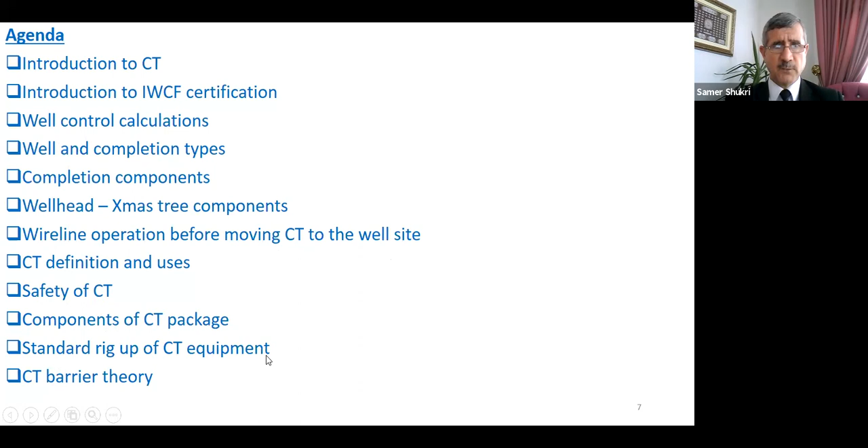We have coil tubing definition and uses, safety of coil tubing, components of coil tubing package, standard rig-up of coil tubing equipment, then coil tubing barrier theory, and also we'll go into pressure control equipment.

We have a primary barrier, secondary barrier, tertiary barrier. These are the 3 barriers: first line of defense, second line of defense, third line of defense, to work safely. Also, typical coil tubing surface stack up.

We have coil tubing applications. We go through them one by one, up to 10 applications.

Then we can discuss working in an H2S environment. We can have something about safety, risk assessment matrix. Quickly, we can look at it.

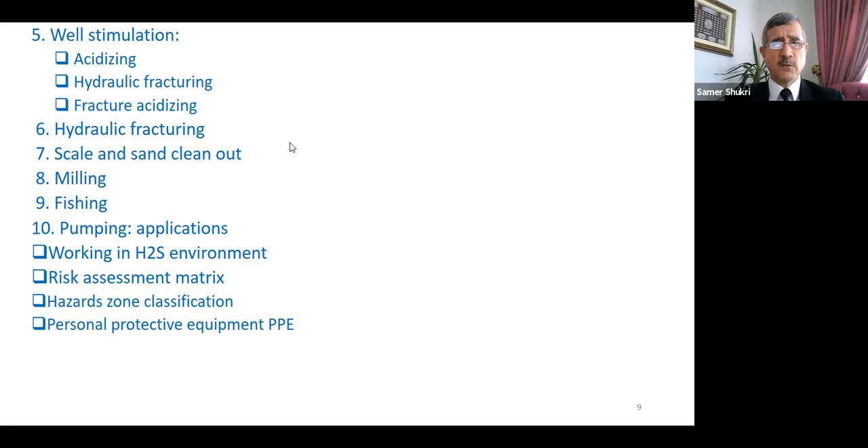Hazards, zone classification, personal protective equipment. These are very important information for you to enrich your knowledge, and without it, you cannot work in the oil field, because you want to protect yourself and others.

So we have life-saving rules. We can have a quick look at the Macondo well, Deepwater Horizon disaster. This is the worst case scenario that happened in the world for spilling of oil to the surface, as 4.9 million barrels of oil escaped from the reservoir to the surface uncontrollably.

We can discuss also the incident of the 3 persons who died in an H2S incident. Coil tubing emergency response procedures - these total 10.

So if you want to work as a coil tubing operator, assistant, or supervisor, you have to memorize these cases by heart. So we have to go through them one by one.

We have also experience exchange. You see here, I will share today only 7, and in the main course, there may be 17 cases. For the time being, we will utilize them, and after that we will go to more and more.

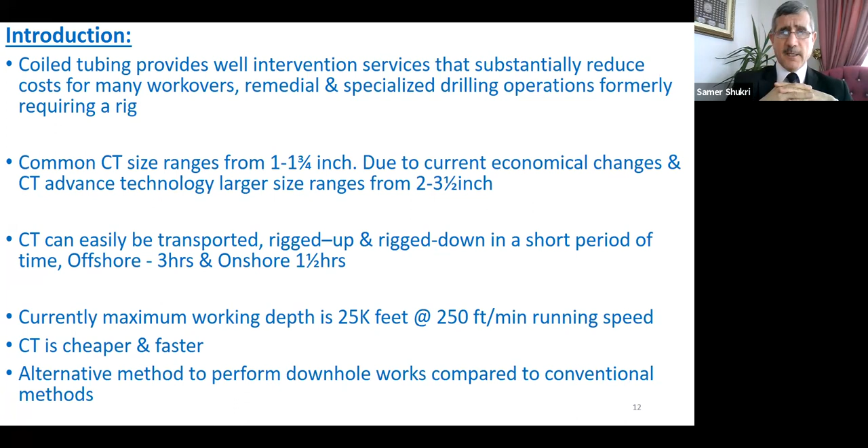So you can depend on it. Every place in the world, you can find this coil tubing. You can work many operations with it. We can have a look at this video, please.

Approach to enhance completion efficiency. Weatherford's vast array of through tubing technologies, coiled tubing conveyance, and industry-leading composite bridge plugs can reduce trips in the wellbore and allow more efficient plug milling.

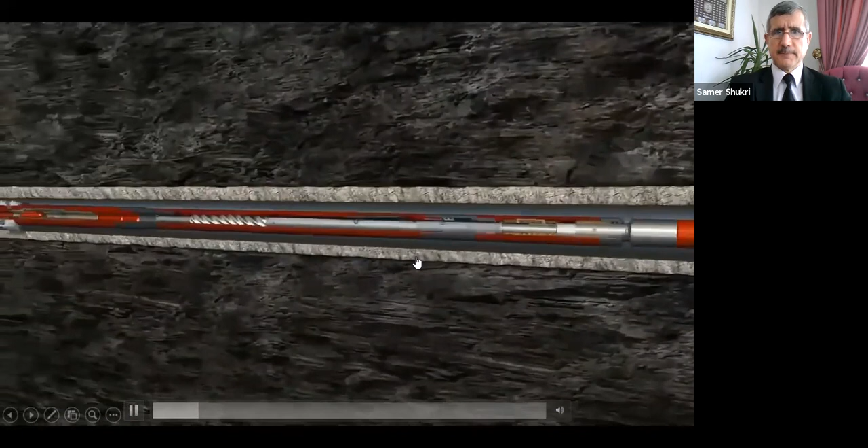You see, one with a milling assembly to prepare the toe and clean up any residual cement, and a second with tubing conveyed perforating guns to perforate the toe, since this is a horizontal well. Weatherford's Flowmax perforator allows this operation to be done in a single trip through the use of a flow-controlled valve, saving operators up to 30%.

Here, after drilling, we run it and do milling for this cement, and after that we will continue with the operation. This is the cost for this routine wellbore service.

After locating the cement obstruction at the well toe, circulation is increased to optimum milling rates to remove the cement and clean any debris. Once clear, the BHA can be pulled up hole to the initial perforating location.

So after milling the cement, this cement is resulting from the rig. After removing it, we can pull the milling tool with the coil tubing up, and then we do the perforation, flowing out the carbide jetting nozzles.

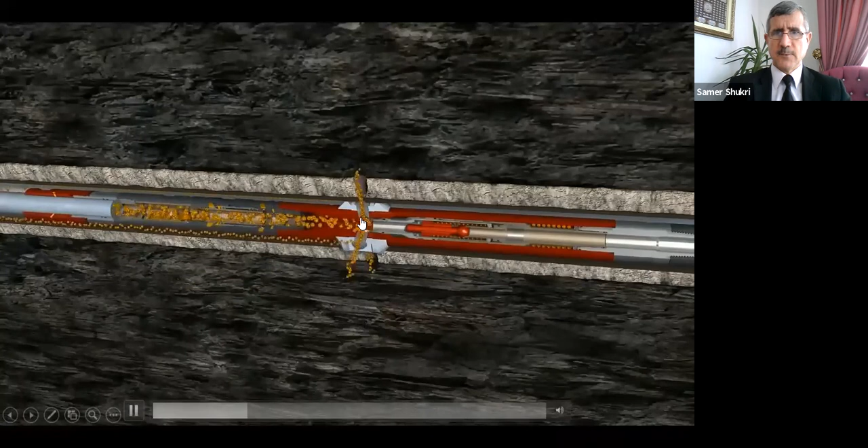Once at jetting pressure, a sand slurry is introduced to begin jetting through the casing, cement, and extending a cavity into the reservoir. You see, this is perforation. This process can be repeated multiple times until the required quantity of perforations are made.

After the coiled tubing BHA is removed from the wellbore, proppant-laden frac fluids are pumped from surface to fracture the formation, as pressure builds beyond the compressive stress of the formation. After perforation, we do the frac.

It seems that this video is long, so we'll restart it. No problem, we'll start again. One minute, please.

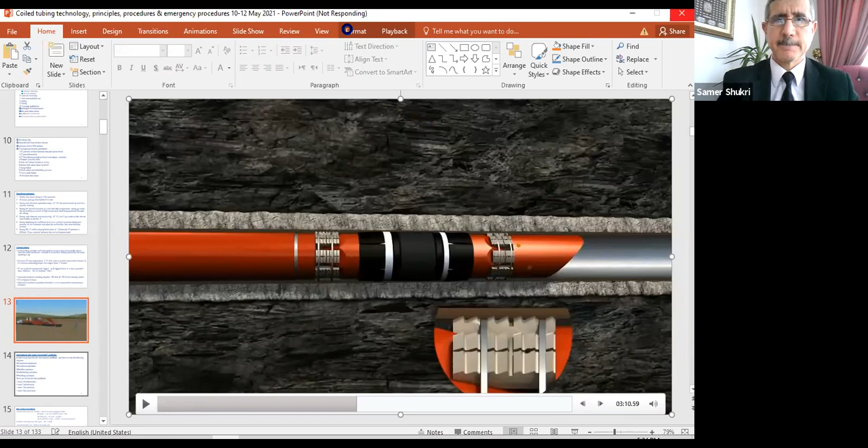About the IWCF certificate, we have 4 or 5 sections for IWCF: completion equipment, completion operation, wireline operation, coil tubing, and snubbing. Snubbing is rarely used, so we can focus on coil tubing in this course and wireline. Last time, we also focused on completion equipment and completion operation.

We have levels for this certification: 1, 2, 3, 4. So the new ones may be introductory for them. After that, the operator, then the supervisor.

Now we have these calculations for well control. I think you have them. You have to memorize them and keep them with you, because these are formulas very important for you to work in the oil field. So you can memorize them for calculating hydrostatic pressure, bottom hole pressure, reservoir pressure, specific gravity.

API, oil density, water density. All of these you have to memorize and keep in your mind, also for calculations and volumes.

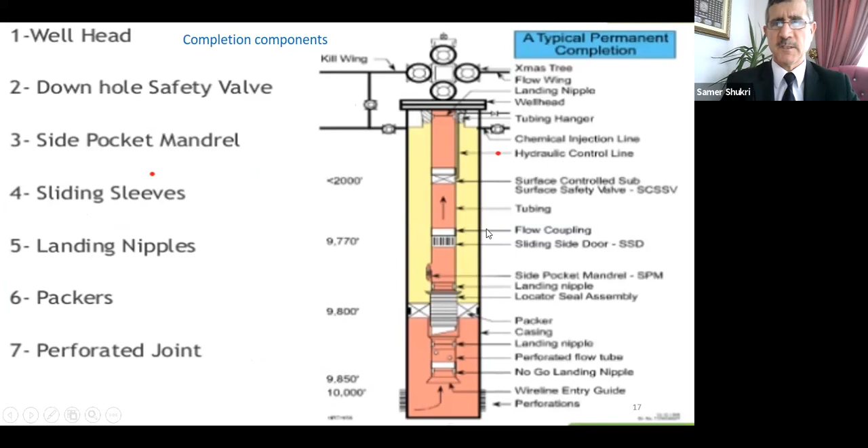Here also the completion components, we have them from top, from the Christmas tree to the formation. We have them one by one.

Here also the safety valve, subsurface safety valve, it is very important to secure the well in case of an emergency. So we have these types of the mechanism of safety valve.

This is a flapper type. Also we have ball and seat, but for this one, flapper type, we have flapper open. You see this flapper, it is open, the safety valve is open. When it is closed, the safety valve is closed. It is operated hydraulically from the surface.

Surface controlled subsurface safety valve. You will hear about it too much, so you have to learn these concepts and make yourself familiar with them.

Also, wellhead: we have wellhead that supports the casing head and tubing head, and at the top also we have the Christmas tree.

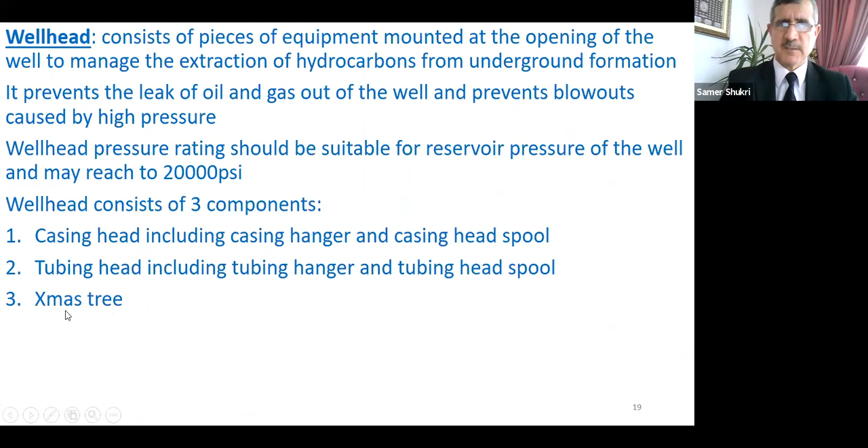These ones, this is the conventional Christmas tree. We have it normally 3 and 1/8 or 5 and 1/8, either 3,000 psi or 5,000 psi rated working pressure.

You see how big it is. The flanges, studs and bolts, they are worked on here in the workshop. So we produce from here.

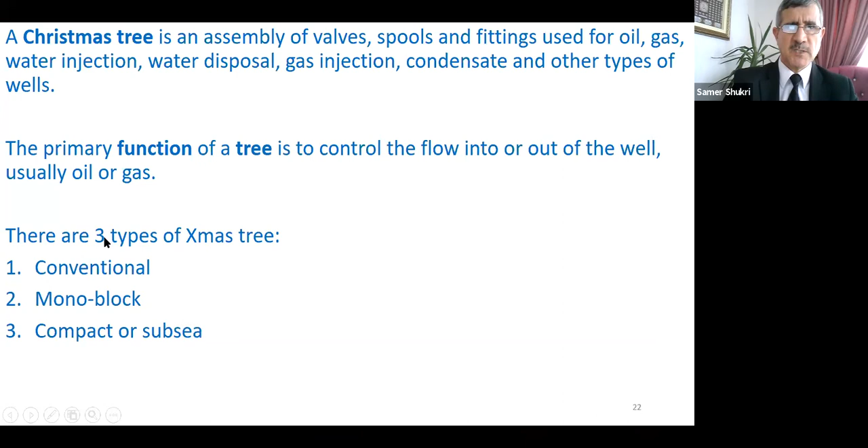This is the wing valve and to the station. Here is the Christmas tree. Also, we mentioned these types of Christmas tree.

This one, this is an actual real Christmas tree. Here is the wellhead, and above it the Christmas tree.

Here also you have to memorize all of these valves and know the name of this valve, what's the name of this. This is a choke valve, like this.

Here also the well will flow from here to the station. The station is here. We separate oil from gas and water. The gas is sent to the gas plant.

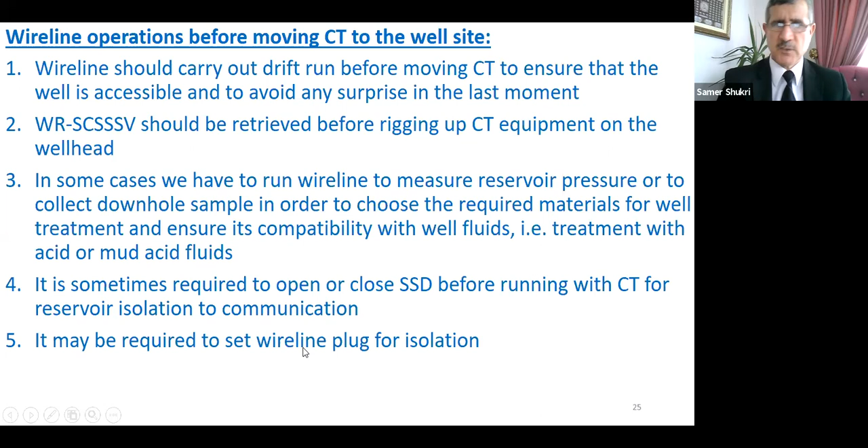Also, sometimes it's required to open and close the SSD, sliding side door, before running coil tubing, for reservoir isolation or communication. It may be required to set a wireline plug for isolation also. So wireline is combined with coil tubing, and it can be utilized for very fast operations.

Now we move on to the coil tubing. What is coil tubing? Coil tubing is a continuous string of tubing rolled onto a spool. It is made from rolling strip material into a tubular, so it is metal, continuous metal.

This metal is made up and welded in the factory by the manufacturer, welded, inspected, and tested. After all of these checks, we choose the required length, for example 20,000 feet, then send it to the end user, say Schlumberger or Baker Hughes or whoever, and they can use it with this length. Sometimes they send 25,000 or 15,000; it depends.

So the coil tubing industry is improving day by day, and it can save cost and save time, and it is efficient in the oil and gas industry. It has a wider acceptance in all operations involved in oil and gas exploration, especially in highly deviated wells and horizontal wells, because wireline in these two cases cannot work properly.

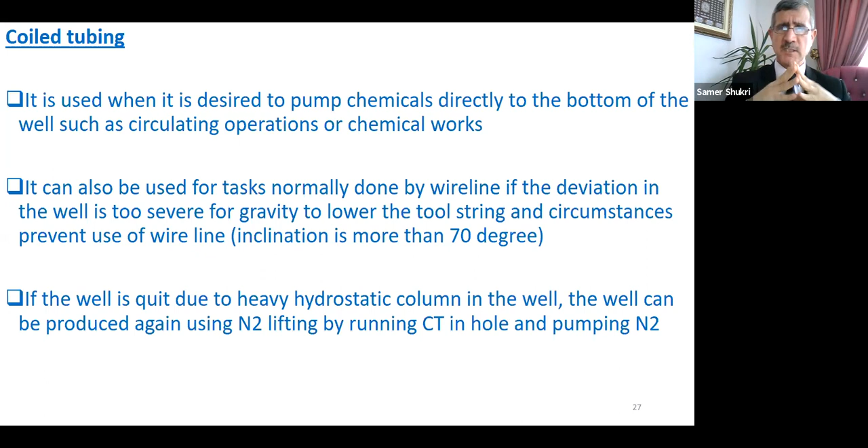If the well is quit also, due to its hydrostatic column being heavy, higher than formation pressure, we can pump nitrogen to offload the well's hydrostatic head that is exerting on the formation.

So here are 10 activities that can be performed using coil tubing. For example, logging, cementing, nitrogen kickoff, coil tubing conveyed perforation, closing and opening SSD in horizontal completion, stimulation and fracturing, scale and sand clean out, milling, fishing, drilling - all of these. So a very wide variety of operations can be done using coil tubing.

We have a heater, a heat exchanger, that moves the liquid nitrogen to gas nitrogen, after which it can be pumped. The boiling point of liquid nitrogen is minus 196 degrees Celsius, so it is very low. At this temperature, we can move the nitrogen from liquid condition to vapor or gas, and then pump it through the coiled tubing, through the inlet, down to the required depth.

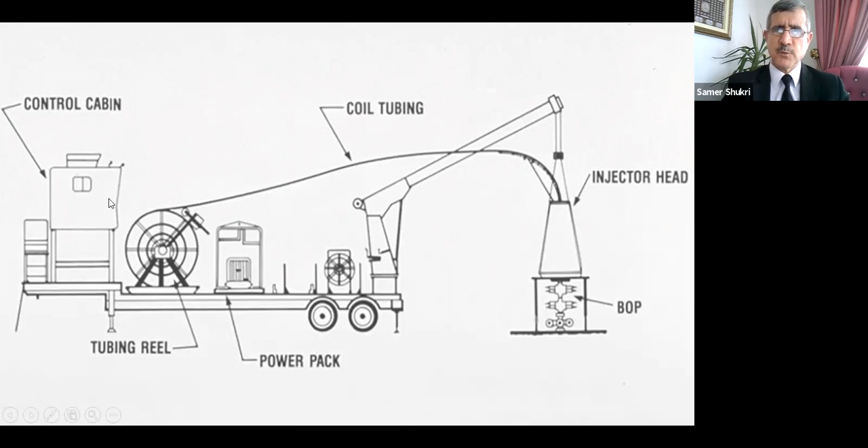Here we have the control cabin also. We can monitor everything happening on the wellhead and this area by the coil tubing operator, so it is under control. If there is a leak here, he can see it. If there is parted tubing here, he can see it. So clear vision is very important for the coil tubing operator to control - he is controlling the whole situation. Coil tubing application also, we can see this. I hope it will not make a problem with us.

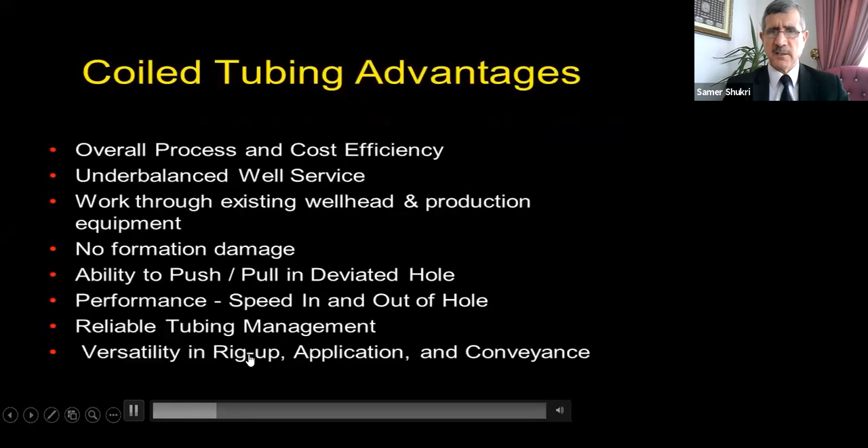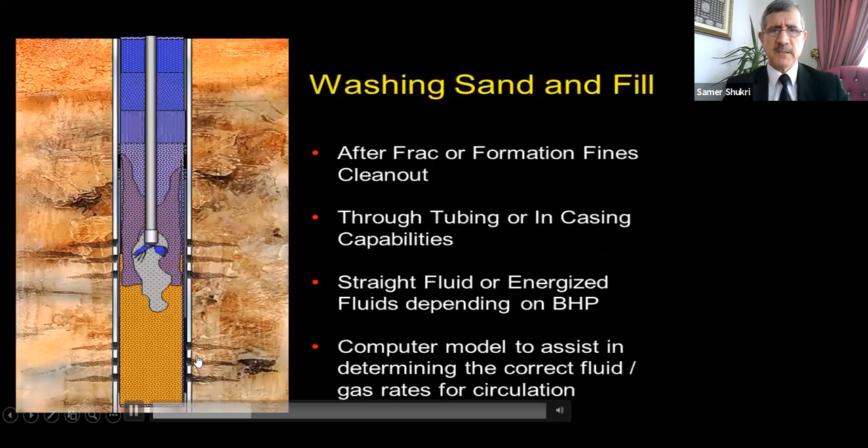You see, why coil tubing? We talked about this - in the course we will talk more about them. You see cementing, drilling, stimulation, well control, completion. So overall of these, the advantages - he is mentioning the advantages, rig breakdown, run, common applications, also removal of sand. We mentioned the nitrogen applications, acid, remedial completions, remedial cementing, washing sand and fill. We'll go through them one by one, but for the time being we cannot take long because it takes time.

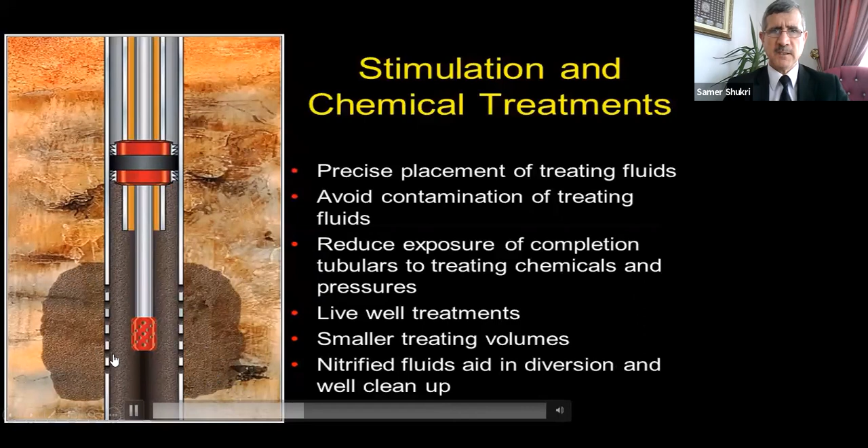We have to be limited to 1 hour for our session. So you see scale removal, nitrogen pumping. Also, we offload part of the hydrostatic head - here there is water, we can offload it to allow the oil to flow. Stimulation treatment also, we pump acid and improve the productivity of this formation. Here, siphon strings also.

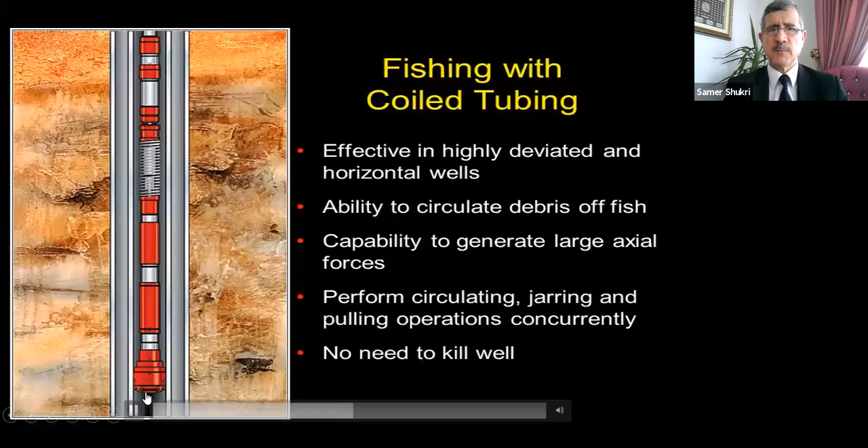Remedial cementing, we can dump cement using the coil tubing. If here we have fishing, we're using coil tubing. It needs much pull force, so we can use the coil tubing because we can go to 40,000 or 80,000 pounds. Here, set and retrieve bridge plugs - you see this isolation tool called the bridge plug, we can set it and pull it. Drilling composite bridge plug also.

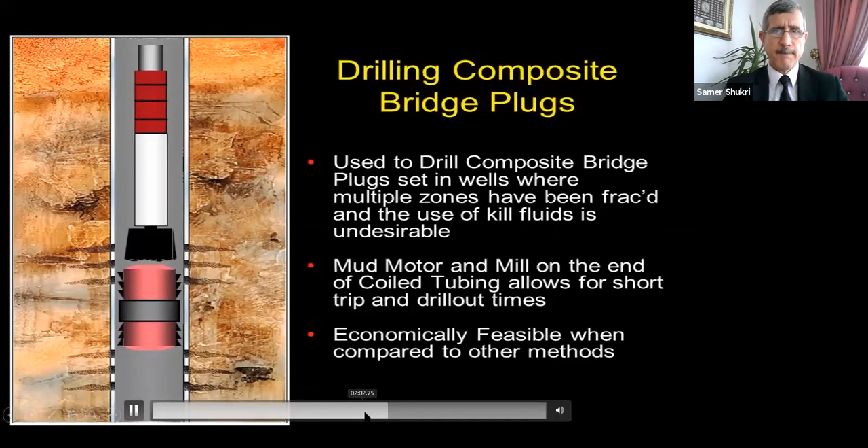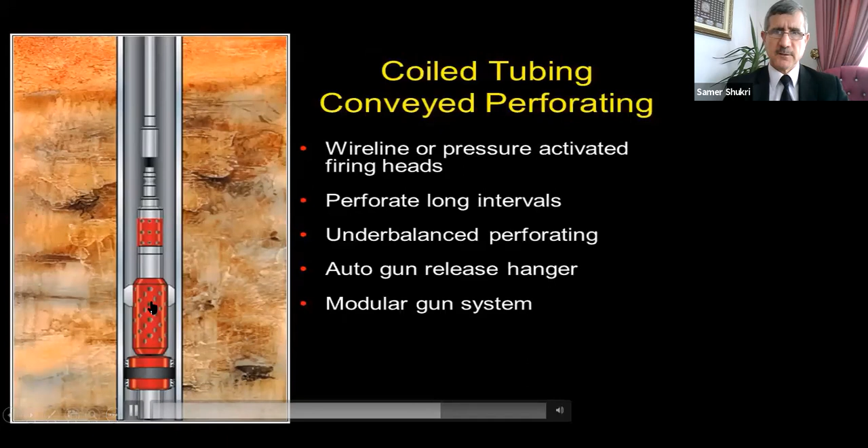Inflatable packer also - we can isolate the bottom part from the upper part of the formation and allow it to produce. Logging is a vital part of our work, logging on coil tubing, especially in horizontal wells - it is safe and can be done. Also perforating conveyed with coil tubing. We can also run completions with coil tubing and set it in the well. Recompletion, high pressure coil tubing applications.

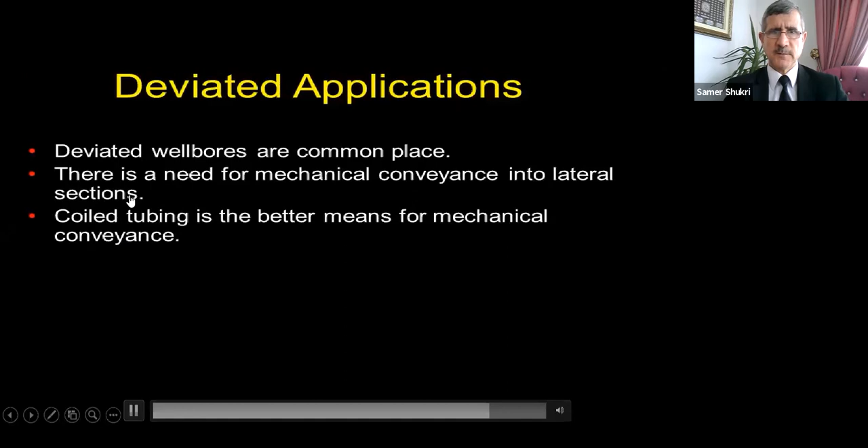Deviated applications also will work commonly, needing mechanical conveyance into the lateral. We have types of common cleaning tools: wash nozzle, fluid jetting nozzle, and positive displacement, 3 types, for blocking issues. We can go through them one by one.

Use of polymers, this is also chemicals that can be pumped into the reservoir to enhance its productivity.

Safety of coil tubing is a vital practice, ensuring that all components of the coil tubing package are certified and checked. Each single part of the coil tubing package should be checked and certified. If it is not valid, we have to reject it and request another valid and inspected equipment. This includes checks, function test, pressure test, and equipment certificates from manufacturers.

An incident of coil tubing could lead to damage. It can damage the equipment itself, cause damage to personnel working on it, and may lead to fatality, as well as pollution to the environment and damage to the company reputation. I will show you some videos now.

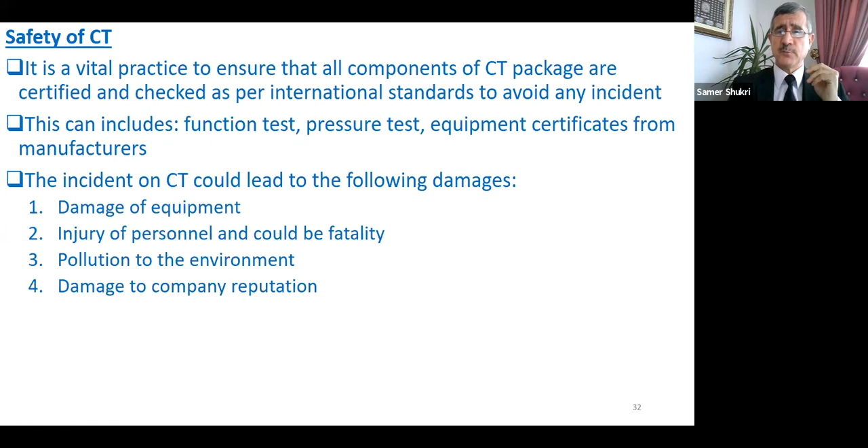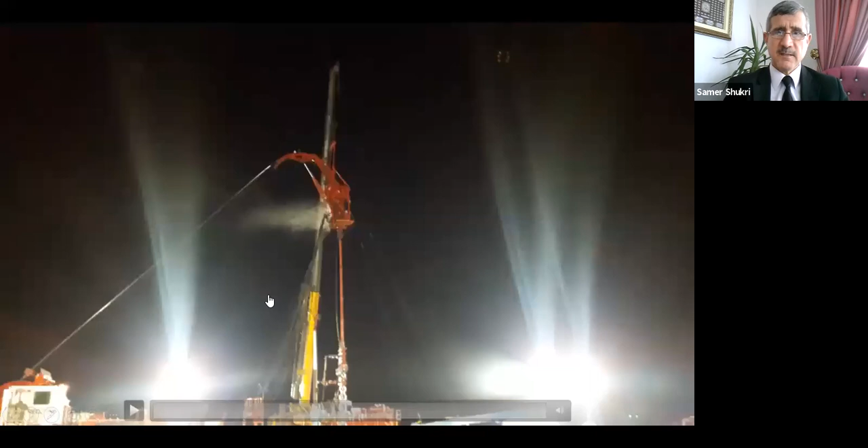You see this one, I will show you the video. You see there is gas here. So what we should do here in this case, we stop coil tubing. Yeah, this is not good.

It is very dangerous, this situation. Any spark will make fire here in this area, in the injector head. Especially during the night, the focus during the night is less than during the day.

I just saw something in the air. I thought it was just a butterfly or something in the air. Got a big one there.

You see, it is clear here. No.

There is a stripper here below the injector head, and it is leaking. So we have to close this, stop coil tubing, close this BOP, pipe and the slip rams in this area, and secure the well. Bleed off the pressure above it and replace the stripper above here. So it is not safe to continue like this, quick action should be taken.

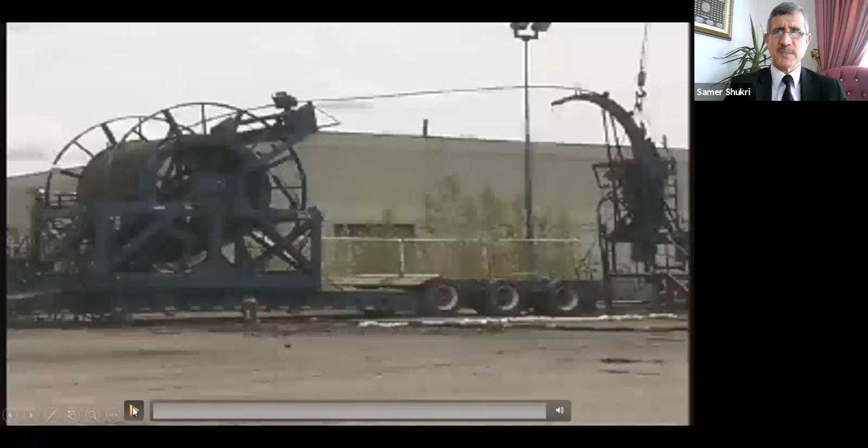Here, if you prepare yourself for a dangerous situation, look at it please. Here we are running in hole with coil tubing, here is the injector head, look what will happen.

Look at here, you see? If anybody was walking near it, it will be a disaster, especially if there is acid pumped inside the coil tubing. So we have to take care.

Here coil tubing fundamentals, also during the course I can show you this video.

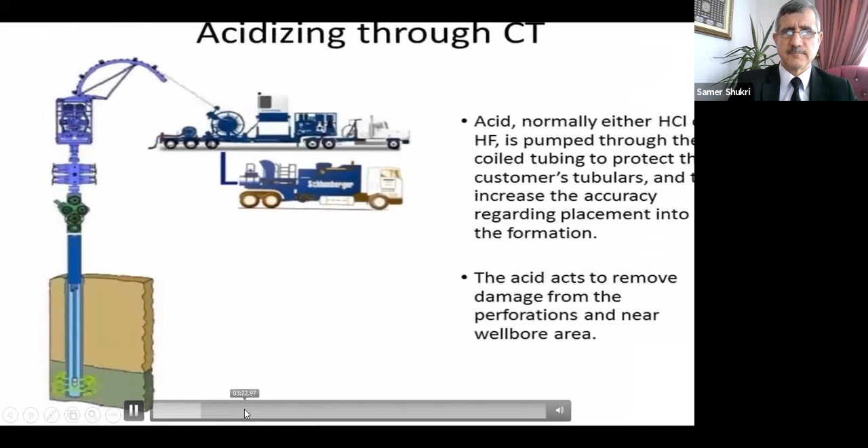You see, objectives. You see all of these.

So we can move on to coil tubing rig up for logging on high pressure wells. You see, this is the rig up, it is not easy, not simple, it needs precautions. We have injector head, gooseneck, injector head, the stripper.

We have blind and shear rams, this one, this is a combi BOP, and the lower section is pipe and slip rams. Here also we have a riser to include the tool string, and we have a deployment stack also.

Here we can close this BOP on the deployment bar. Below it we also have the quad BOP: blind, shear, slip, and pipe rams. We will take them in detail, and wellhead here.

So we can run maybe 90 feet of wireline tool string and run it downhole safely and as per procedures.

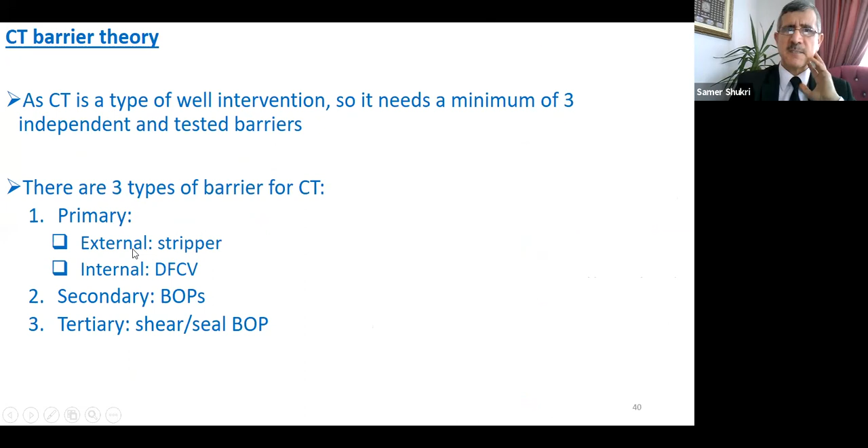Coil tubing barrier theory: as coil tubing is a type of well intervention, it needs a minimum of 3 independent and tested barriers. We have primary, secondary, and tertiary. We go through them one by one: you see primary, secondary, and tertiary, these ones.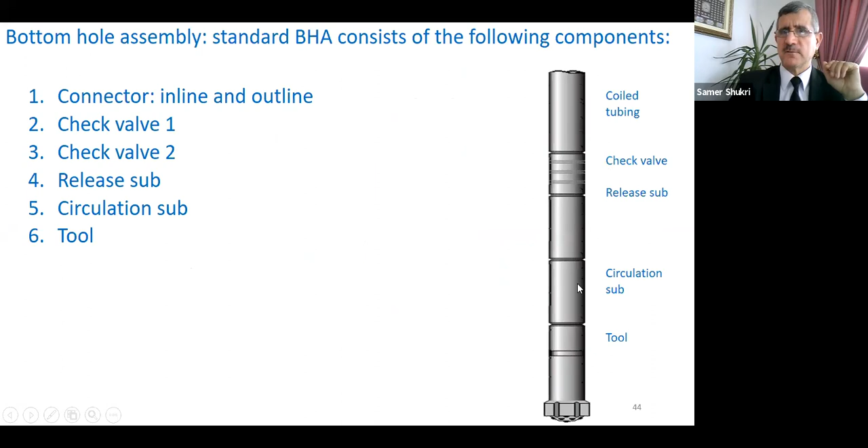We have pressure containment. We will talk about the primary barrier and the types of it. We have 4 types. We have also the BHA. What is it consisting of? These parts. Also internal barrier, the types, main types of the check valve.

We have flapper, dome, dart or dome, and ball and seat. We have other types, but these are the main types. We have also the secondary barriers. We have ram type and annular type. We'll go through them one by one.

You see them. This is a quad, this is a triple, and this is a combi. Here, if you want to cut the coil tubing, what will happen? We have sequence: close slip ram, close pipe ram, close shear ram, then pick up coil tubing 2 feet, then close the blind ram. In this case, we secure the well.

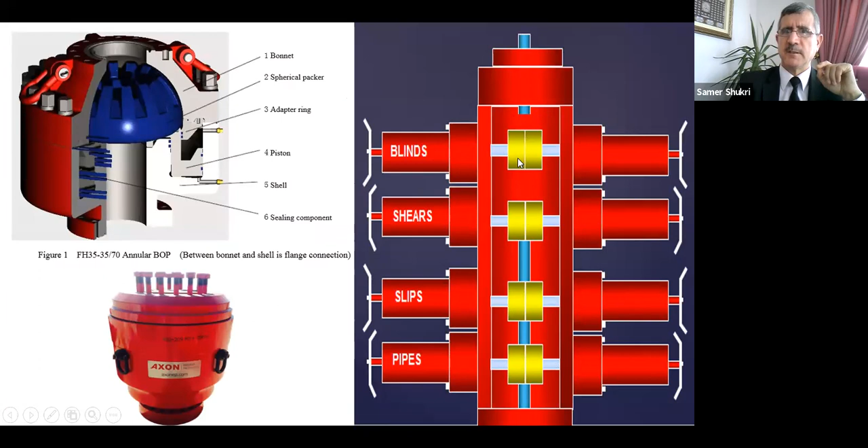We have annular BOP also. We'll go through them. You see, tertiary barrier. If primary and secondary barrier fail, we have to activate the tertiary barrier, which is the shear seal BOP. It is cutting the coil tubing as if a knife. You see it like a knife. It can close like this and seal, close and seal against the well.

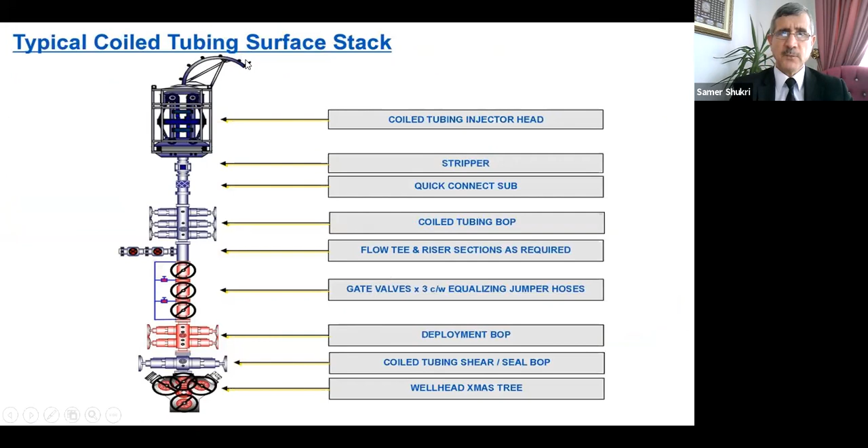Here also the typical coil tubing stack from wellhead to the gooseneck, and each one is explained on the right side. Here, cement plug. How can you set dump cement for say 200 feet or 500 feet using the coil tubing? It is coming from the field experience. I was doing like this when I was working in the field.

So I am exchanging my experience to you, so you can learn and do the same job maybe in a better way. Here we want to isolate full part or complete or part full formation interval or part of it. So we pump cement using the coil tubing, and in this case, we can produce it from the upper one. If there is water here, we can isolate it, and then oil and gas we can produce from the upper part.

Here we have a mechanical bridge plug. We set it using electric line, wire line. You see wire line, electric line, a bridge plug. Here wire line retrievable bridge plug. Set it and dump 3 meters of cement or 10 feet of cement above it, just to make it hold.

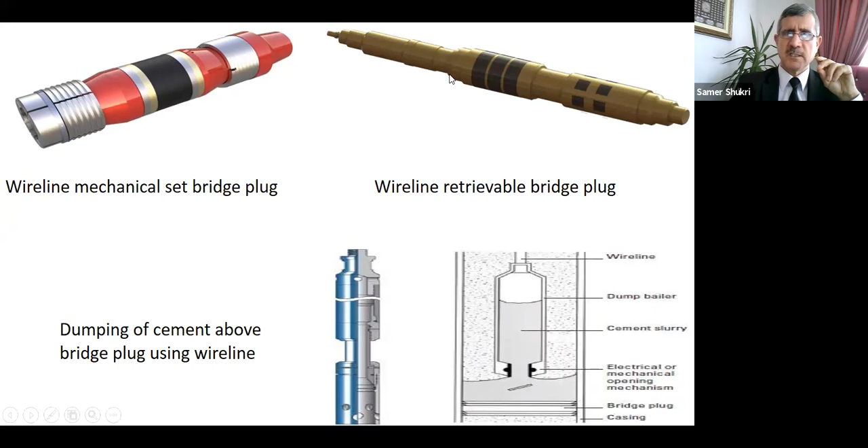If the interval that should be isolated is very long, what should we do? We have to use this one. This is a question that I gave you, so you can answer this one.

So nitrogen kickoff, also we run the coil tubing to a depth, say 2,000 feet, and start pumping from surface or from 500 feet at say 350 US gallon per minute of nitrogen, run in hole while pumping nitrogen. In this case, we will offload the fluid in the well. If it is water, this water will be produced and unloaded from the well, and after that the reservoir fluid oil will be produced, and then we will get the well flowing. After that, we pull out of hole coil tubing and divert the well to flow and rig down our equipment.

Here is the nitrogen tank. It is normally liquid nitrogen. It has 2,000 US gallon capacity. Here is the nitrogen pump. We have a heater, heat exchanger, and many pieces inside it. Radiator here, you see it. It is boiling the liquid nitrogen and moving it to a gas condition. So after that, we can pump it here. You see this line from the nitrogen unit to here, to the coil tubing, then downward.

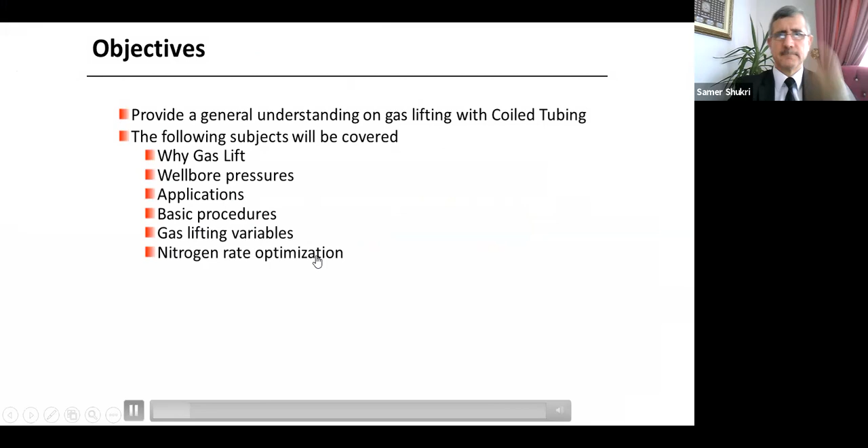Why gas lift? So why do we need gas lift? If bottom hole wellbore pressure is currently greater than the reservoir pressure, the fluid hydrostatic pressure will prevent the reservoir flow. I told you that we offload this to outside of the well.

Let's discuss wellbore pressure relationships. There are 3 scenarios of wellbore pressure relationships. The first scenario, called overbalance, where the pressure inside of wellbore is greater than reservoir pressure, normally occurs when we're drilling a well. The second scenario, called underbalanced, where the pressure inside of wellbore is less than the reservoir pressure, normally occurring when we're producing the well. The third scenario is called balanced, where the pressure inside of wellbore is equal to reservoir pressure.

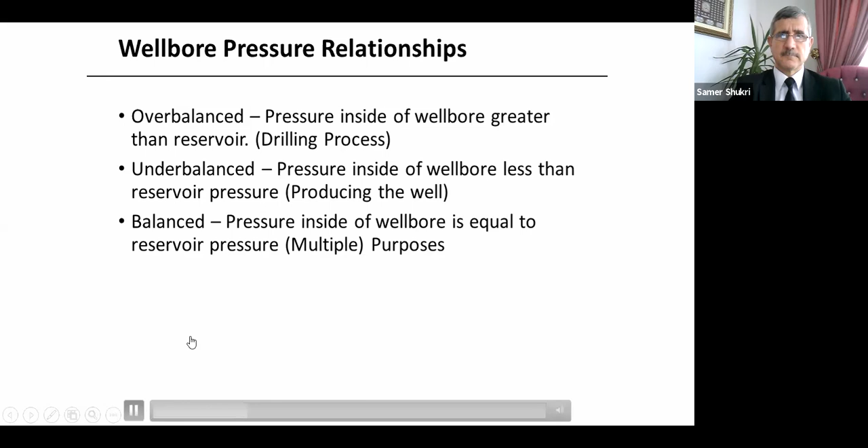Gas lift applications: well kickoff and well unloading. Let's review gas lift applications. There are two purposes.

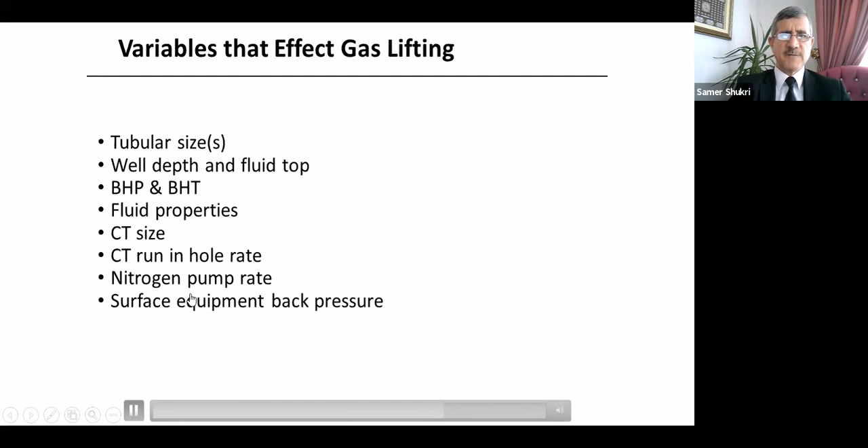Key considerations include expected fluid volumes, fluid properties, downhole restrictions, and fluid loss to formation. Variables affecting gas lifting operations are tubular size, well depth, fluid top depth, bottom hole pressure, bottom hole temperature, fluid properties, coiled tubing size, coiled tubing run in hole rate, nitrogen pump rate, and surface equipment back pressure. All of these factors affect the performance of the coiled tubing.

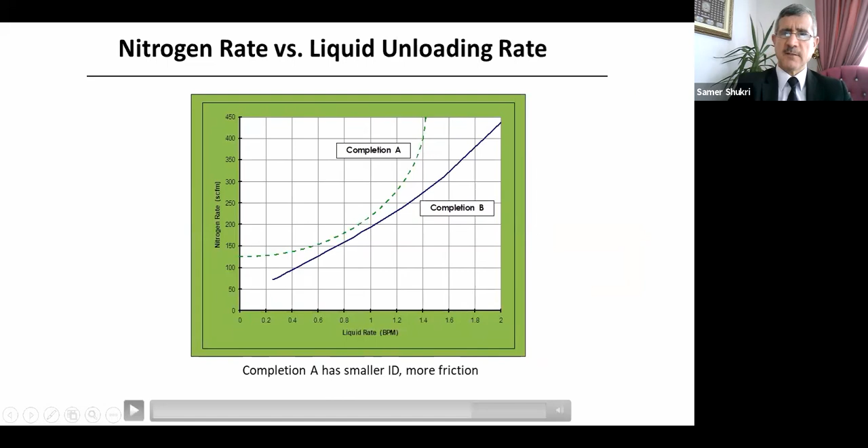We also have coiled tubing conveyed perforation, especially in horizontal wells. We run it at 70 degrees and more inclination, for horizontal wells where electric line cannot be run. So we can perforate it either live or with coiled tubing.

We have pressure control equipment. You see these are the perforating guns and the phasing of each one. Each has phasing of 45 degrees, sometimes 60 degrees, so we have to make it 360 degrees to cover all the tubing or casing for perforating.

We also have open and close SSDs in horizontal completions, as wireline cannot be run, and we run a shifting tool to open or close them. You see it like this.

This is a horizontal completion. We can open the first one and close the third one, and so on. But all should open going down and close going up, or the other option, all closing going down and opening going up.

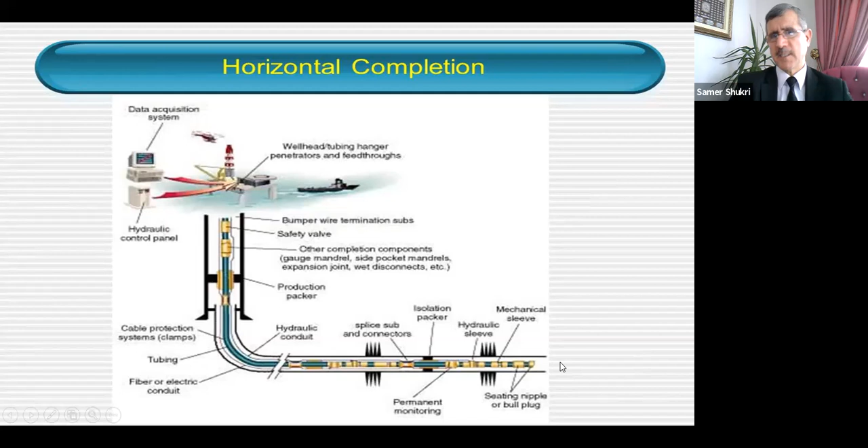Well stimulation is the most important operation we can do on a well to enhance productivity or injectivity, because we have oil producers, oil producers, water injectors, gas producers, and gas injectors. So as we have production, we have injection also - to maintain reservoir pressure high and keep the well flowing naturally.

We have two main stimulation techniques: acidizing and hydraulic fracturing. Most of you have heard about acidizing stimulation and hydraulic fracturing.

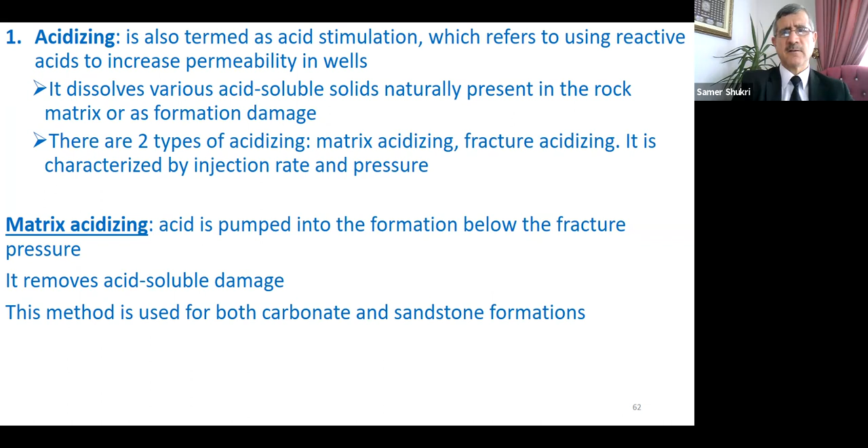We can go through acidizing. What are the types of acids we can use? What chemicals, why, and how can we pump acid? What is the purpose of pumping acid? Why do we pump hydrochloric acid for carbonates, and for sandstone we pump hydrofluoric acid? All of these we'll discuss in detail.

These are the types of acid. We have organic acids and non-organic acids. HCl and HF are non-organic acids, while if we have high pressure, high temperature reservoirs, we use organic acids: acetic acid (CH3COOH) and formic acid (HCOOH). These are for high pressure, high temperature wells. The non-organic acids are for normal and low pressure wells.

Additives include corrosion inhibitor, friction reducer, surfactant, iron sequestering agent, diverting agent, non-emulsifier, and anti-clay. I will give you an explanation about them one by one.

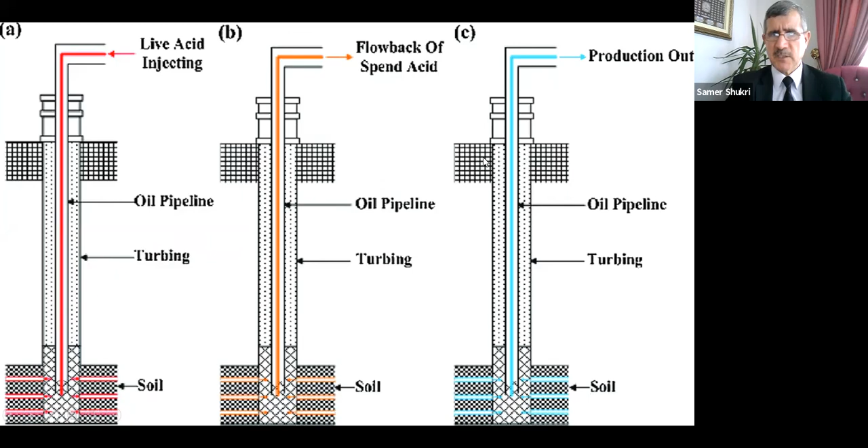You see, when we pump acid here, we inject it in the live well. After that, we flow back this spent acid, then the well will produce. Here the formation was plugged, here the formation is open - the productivity is enhanced.

We have to improve the delta P - the difference between formation pressure and bottom hole pressure. As this value increases, the productivity will increase.

The formation near the wellbore was contaminated, or there is a skin effect, or something preventing the formation fluids from moving from the formation to the wellbore. This is where stimulation applies - the yellow is the acid - which allows flow from the formation to the wellbore, then from the wellbore to the surface facility.

For hydraulic fracturing, we increase the pressure applied to the formation above the frac pressure. I will explain about the frac pressure if you don't know it.

We have also to use fluid, water, proppant, gelling agent, foaming agent, compressed gases, nitrogen, CO2, air, corrosion inhibitors - all of these for the fracturing. Fracturing stage also we make here, especially in this shale. You see this is shale. It is not easy to open it, but with high pressure, you see the shale fracture, and we pump a proppant here between them.

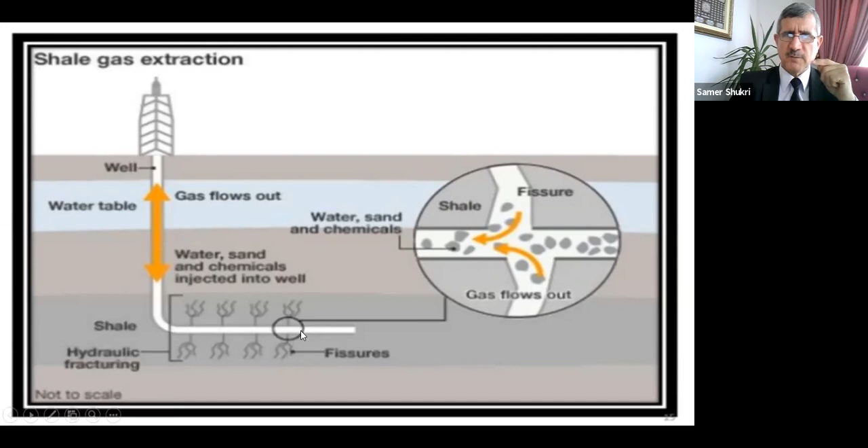So when the pressure is dropped down, these spaces will be kept open using the proppant. You see water, sand - proppant is a type of artificial sand. So we pump it after making the frac in the formation, and allow the formation fluid to flow from the formation to the well, then to the surface. This is a fracture here, proppant or artificial sand, or sand itself. We allow the formation fluids to flow from the formation to the wellbore. This is a frac operation.

Imagine how much it is difficult, and what time does it take, what is the cost of all of these. These are tankers for moving fluids to the well site, and it is 24 hour operation. You see, pumps - all of these are pumps. So no stop. As you stop, it will make the operation fail.

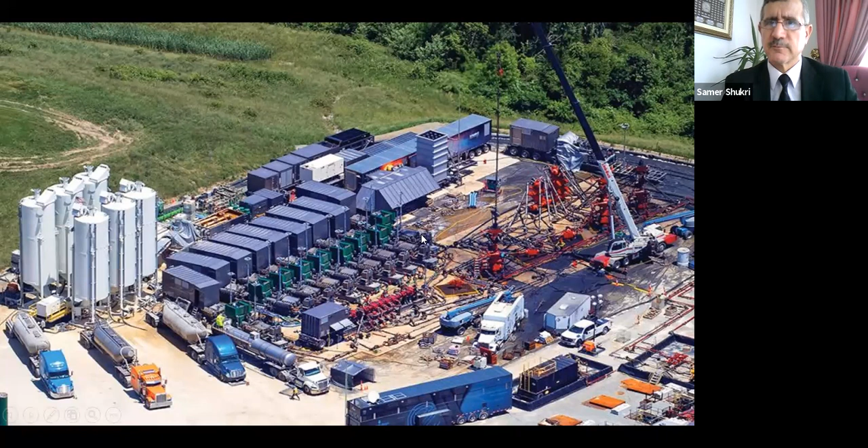This is here also. This is wire line. Sand clean out also, we can talk about it using gel. We can use nitrogen if there is high pressure applied on the formation. We can explain all of these. We are taking a quick view now, but the details will be within 3 days.

You see, this is casing tubing. We either pump from this coil tubing to the annulus, coil tubing annulus, or the vice versa, the opposite direction. From the annulus, we have to remove the BHA here. If we have the flapper check valve, it will not work. So when we have big coil tubing size, 2 inch and more, we can do this one. Otherwise, the coil tubing will be plugged.

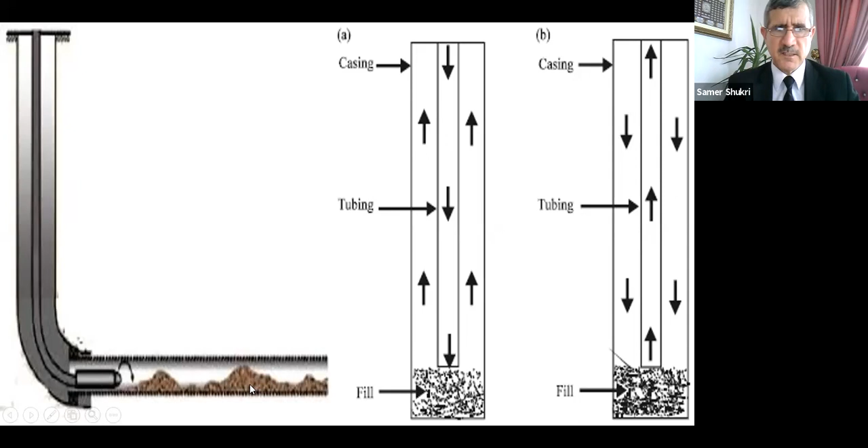You see, this is the fill, sand here or scale, whatever. The milling also, we can - you saw the video, it is milling the cement. We can mill also the ball drop system that is done after setting the completion or the casing. We have bridge plugs also, we can mill them to go to the formation below the bridge plug. So the milling is an interesting subject.

We can move it. We have here the different tools that are used in the milling operation. You see, this is the bull nose. We can use it. We have motor here, you see, work over motor. This is motor stabilizer also for stabilization, and this is BHA.

For fishing also, we can fish. For me, I was fishing the stuck wireline plug from the completion using this coil tubing and fishing tool. We were fishing it successfully. So in this case, we can utilize it.

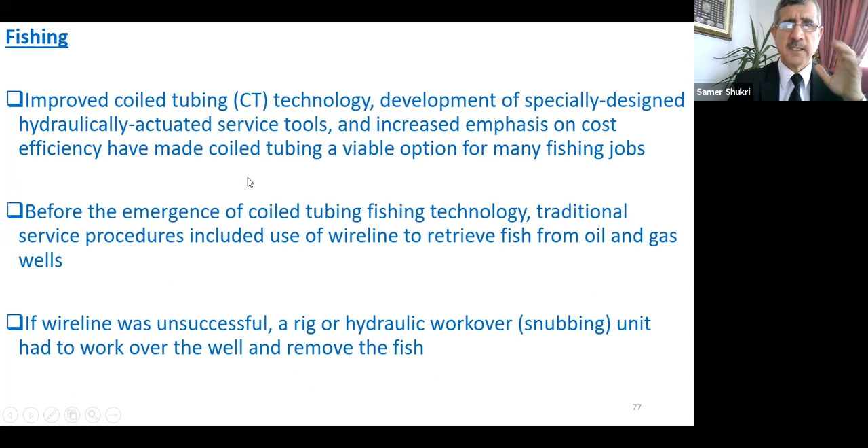We apply till 40,000 pounds or more sometimes, but with wireline, you cannot go more than 2,000 pounds. So this gives us the ability to work much stronger. You see, all of these are fishing tools also. Jar, we have weight bar - we have all of these run with the coil tubing connector.

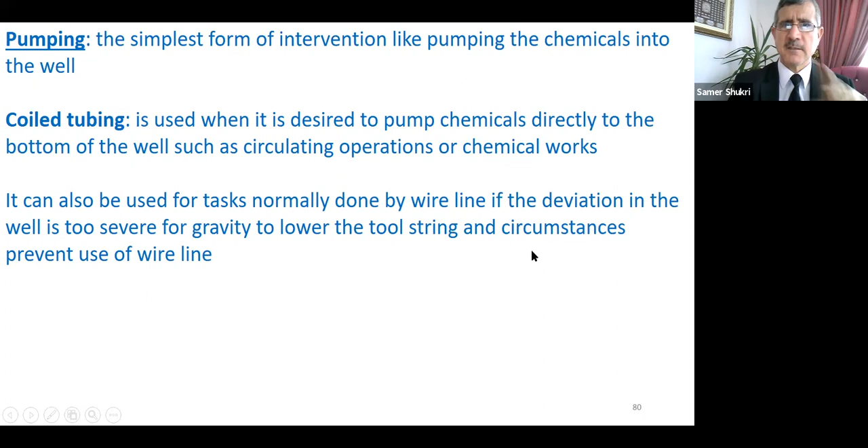While working in H2S environment, all of this equipment, either wireline or coil tubing, it should be suitable for H2S environment. Otherwise, it will be embrittled due to the corrosive action of the hydrogen sulfide. It will be embrittled and will fail, and we will lose our equipment. So you have to familiarize yourself with the characteristics of the H2S and know that it is corrosive.

It has odor of rotten eggs. It is dangerous. It is produced with gas and water and is heavier than air. It can accumulate in the low areas. It can kill a man at a concentration of 1000 ppm. All of these, you can see them - we have warning signs: very toxic, extremely flammable, dangerous to environment.

So you have to, in UAE, I worked in a field that has one of the largest H2S percentages in the world, in the whole world.

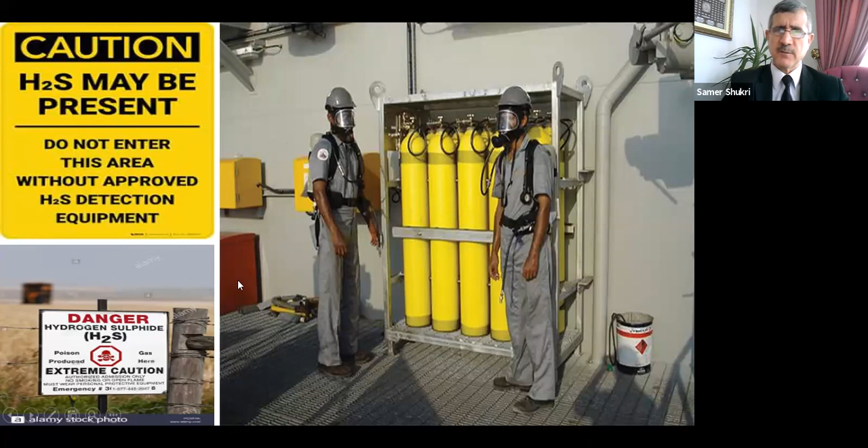So this is long, it needs more explanation. We cannot go through it now in detail, but you have an idea about it.

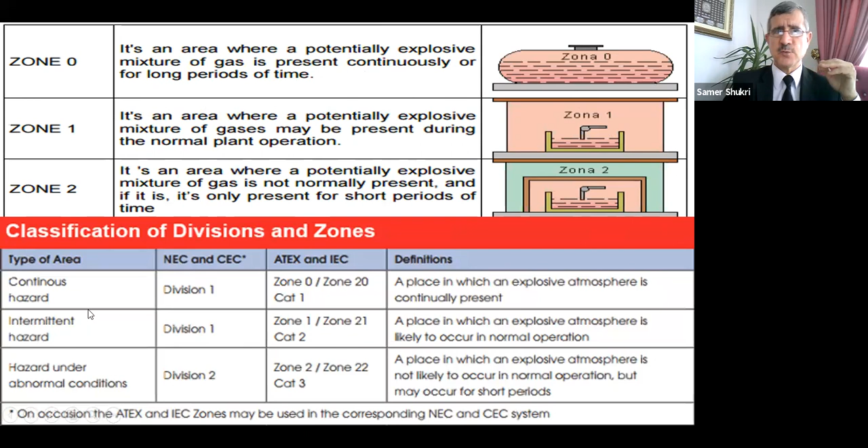We also have classification for zones: zone 0, zone 1, zone 2. For coil tubing and wireline, we have zone 2. If you have a flare, for example, it is zone 1. If you have a tank with a roof above it, it is zone 0. Here is the definition of each one.

Also, personal protective equipment: you have to use safety shoes, a coverall, gloves, goggles, ear protectors, a helmet, and so on. All of this, the coverall and everything, you have to use to protect yourself.

Here also are life-saving rules. We can go through them just to increase the awareness of your knowledge regarding safety. We can go to this incident where 4.9 million barrels of oil spilled into the sea in the Gulf of Mexico. We can give you some explanation about it, and 11 persons were killed in April. Now, 4 or 5 days ago, this incident's anniversary passed. We prayed for the 11 people who were killed in this incident, and many were injured.

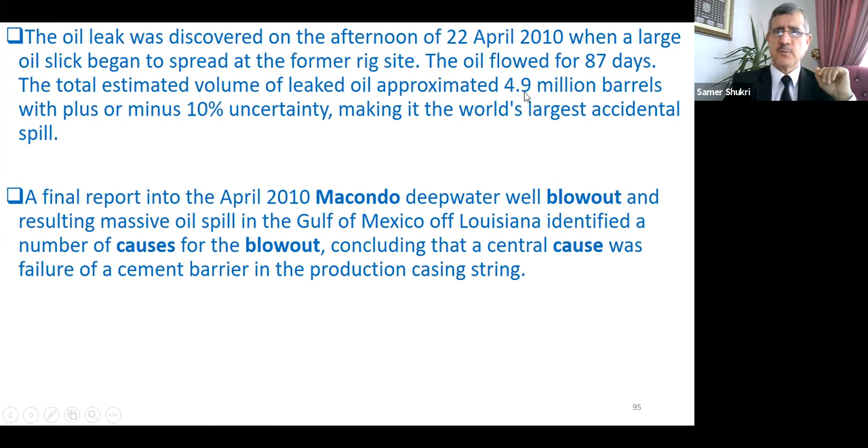This happened in 2010, 11 years ago, and 4.9 million barrels of oil spilled. They drilled 2 relief wells and secured the well. Here we can pass it.

Also, here we can talk about an H2S incident. 3 people were killed. This is in 2009. We call it the H2S silent killer.

The incident happened here. After that, ADCO in Abu Dhabi made videos and distributed them all over the world to avoid such an incident, as 3 people were killed, and to increase awareness.

So without this H2S training, you cannot work in any of these fields. This is the offshore fields, and these are the onshore fields in Abu Dhabi, UAE.

So here, as I told you, I worked here in Bab field. It has a very high H2S percentage, so the precautions were at the highest standard. We were trained to deal with the high H2S and protect ourselves and others.

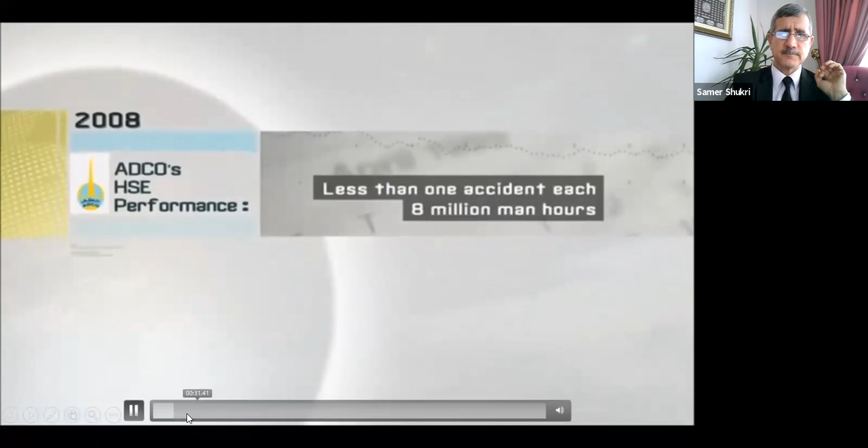These are the fields where I was working. I came to work that morning. I saw my friend Ramesh feeding the bird. The rest of my colleagues were busy in the workshop. No one was expecting the foreman Tariq to call us.

Foreman told us to come and finish a small job, and we would do the permit later. You see, this man died in the scene.

The team set off without a permit, no permit to work in a hazardous area. This was a deadly shortcut. It was to be their last journey.

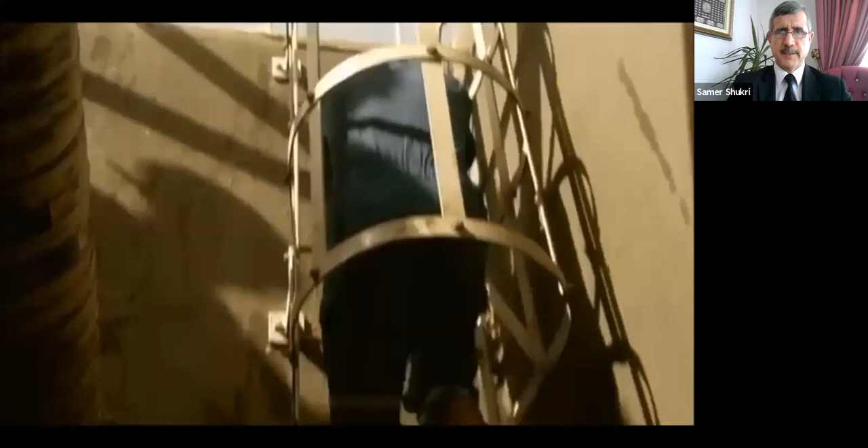Ramesh was told to go down into the pit and fix the rope that had slipped off the valve. Then I saw him climb up the ladder to the second and third step, and then he fell down.

First one died. The foreman called out to me, 'Stop the pump.' I didn't know what was going on. I could see Tariq trying to lift Ramesh up, and within less than a minute, Tariq had collapsed to the ground.

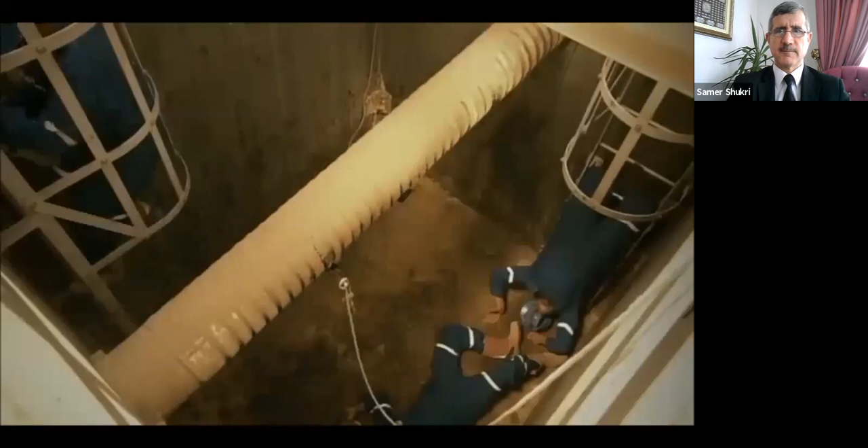Three people. It was a big shock for me.

Every morning as we leave, we need to identify the hazard. And H2S is one of the big hazards we monitor on a daily basis to eliminate it.

We learned our lesson from this tragic incident, and we have engaged the whole organization to make sure that we do not face this kind of tragedies.

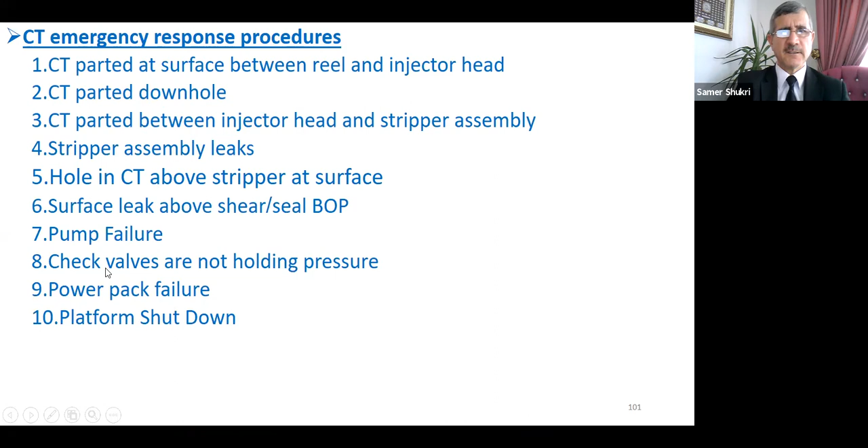Anyway, we can jump here. We can take the last subject: coiled tubing emergency response procedures. These are the most famous and important cases that we can find in coiled tubing operations. We can go through them one by one.

Each one we can go through one by one. Then I added this section, experience exchange, some problems with solutions that I faced during my work in the oil field. As I told you, I have 25 years working in this industry, and I faced many conditions and cases that I can transfer to you.

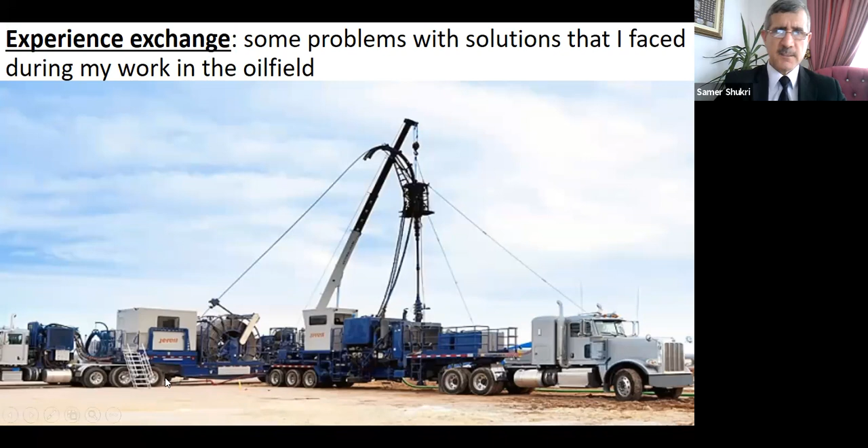You see, this is the coiled tubing package. I can mention the first one. I want to make it easy for you. I don't want to make it complex so that you cannot imagine it. I want to make it simple and easy for you to understand, because some of you may not have seen any piece of equipment or visited any oil field. So I make it easy, and I can discuss them one by one.

He told me, 'The station shut down prematurely, it shut down by itself.' So in this case, I stopped pumping nitrogen and waited till the station returned back, then continued the operation.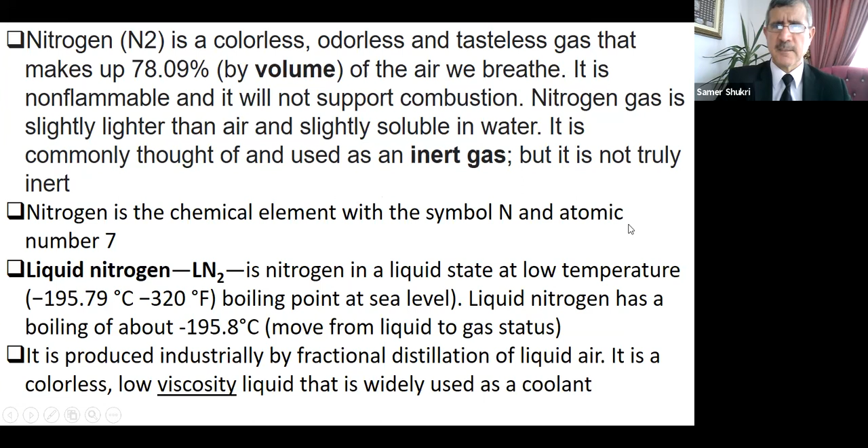Nitrogen has a proportion of 78% of the air volume, so it is lighter than air also. It can be extracted from the air, and it is slightly soluble in water. It's an inert gas, not dangerous. Nitrogen has an atomic number of 7.

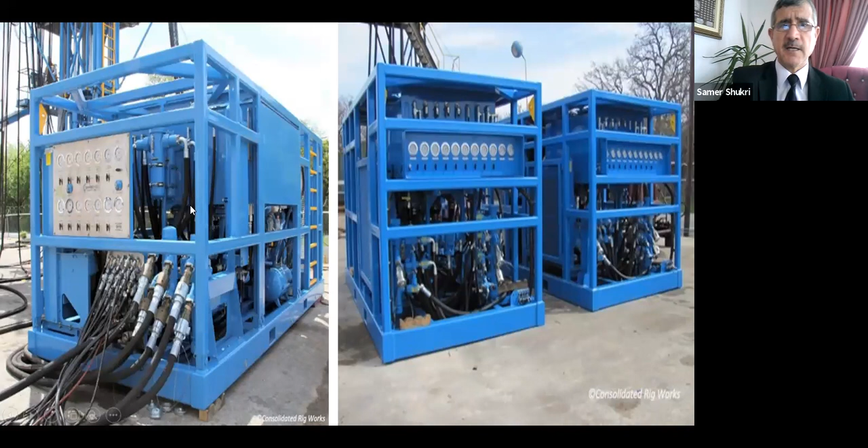It happened to me around 2005, about 16 years ago, or 2004, I remember. We were working, and suddenly this power pack caught fire because there was a hydraulic oil leak. We were doing a clean out. You have high temperature in this case, and the time was summer, so in the desert the temperature was 45 degrees centigrade.

High temperature, and oil maybe sparking also - it's coming from where we did the investigation. In this case, we controlled it using fire extinguishers, stopped the coil tubing, applied the brake, the reel brake, and then replaced this power pack and continued our operation, doing full maintenance and redress. You see these actions which we did for the full redress of the coil tubing unit.

So I will discuss these in detail also during clean out operation using 1.5 inch coil tubing. The pump heated up and then stopped working. The coil tubing was downhole at 8,500 feet.

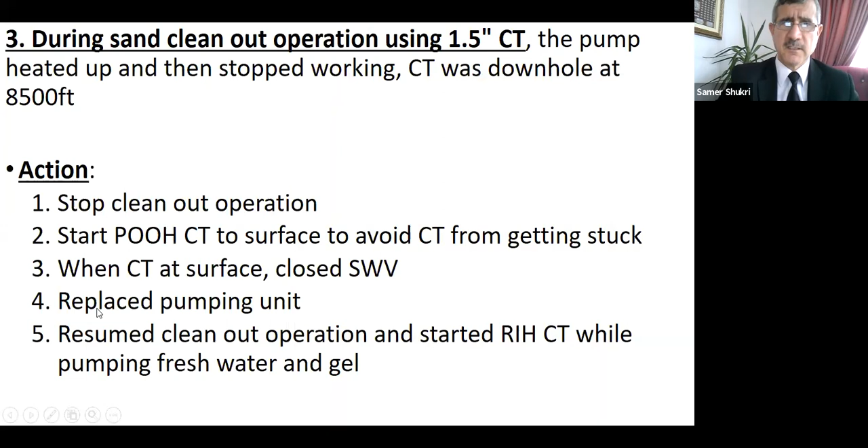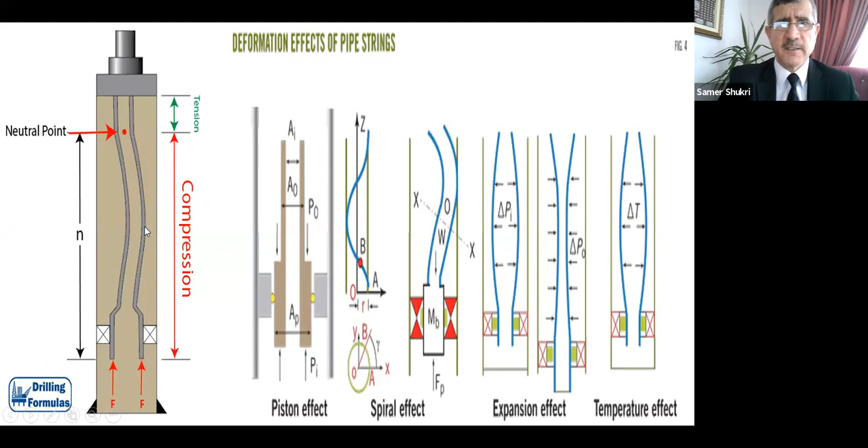In this case, we have to reduce - we stopped nitrogen lifting the well till the temperature dropped down. After that, we continued and pulled coil tubing out to surface. So all of these, we can discuss also during clean out, stuck coil tubing.

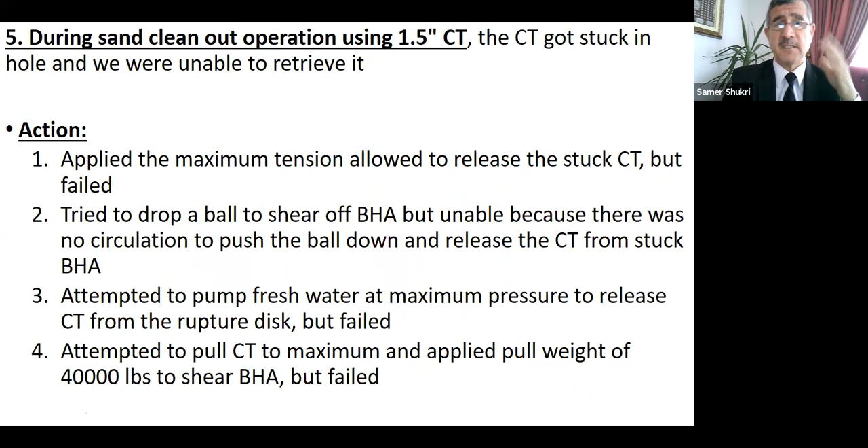After that, we pull the coil tubing 2 feet, then close the blind ram. In this case, we secure the well and rig down the injector head and prepare for the next step. In our case, we ran the coil tubing - pressure here was 0 because the coil tubing was stuck. What did we do?

We run a chemical cutter inside the coil tubing and cut it 500 feet above the stuck depth. In this case, we retrieve the piece of coil tubing above the stuck point. I will show you how we cut it. You see this, like this. We sent an electrical signal to the chemical cutter.

We have two types of cutting, either mechanical or chemical. Here we cut chemically by running a chemical cutter on the coil tubing. We have to fix it before we cut, to avoid moving the tool with the coil tubing up or down, using slips. After that, we can send an electrical signal to the chemical cutter, and we have the chemical charge. This chemical charge has a very high temperature, and it will be directed to the coil tubing.

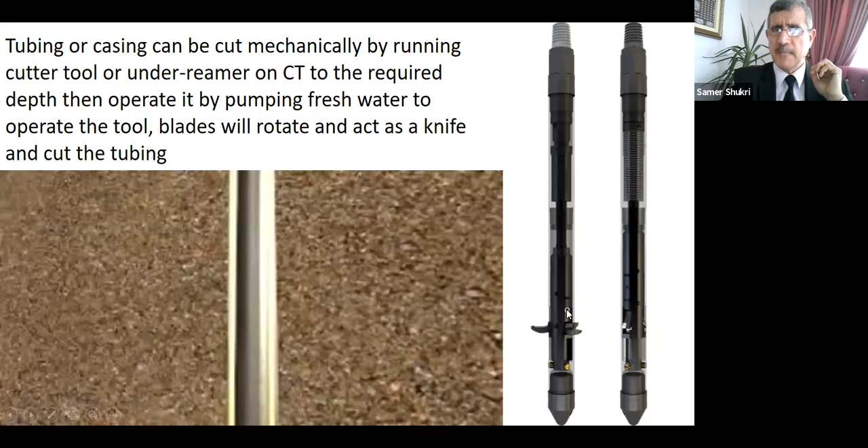When increasing pump rate during coiled tubing operations, the BHA along with the coiled tubing will move up or down. This makes it difficult to keep the knives of a cutting tool in a fixed position when coiled tubing is used to deploy a tool string to cut tubing. To avoid moving it, we fix it.

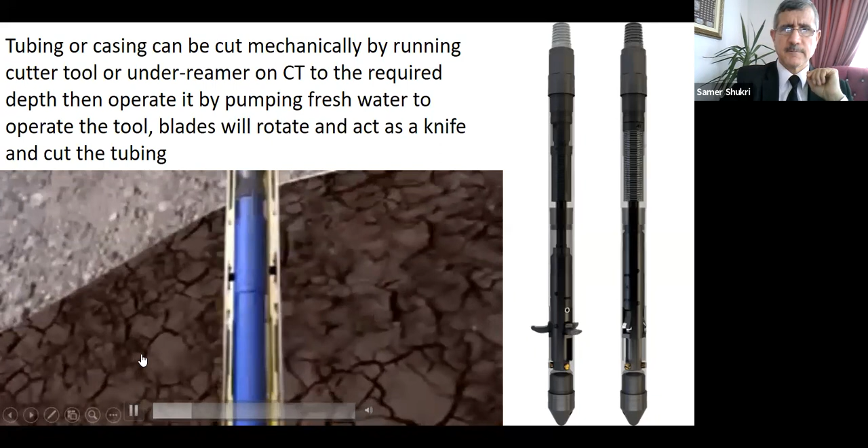A hydraulic mechanical tubing anchor is specially designed to eliminate coiled tubing movement during cutting operations. Both hydraulics and set-down weight are needed to operate the tool. First, to extend the grapple, fluid is pumped through the tool at a predetermined flow rate. Once the grapple has been extended, set-down weight will lock the anchor against the casing wall.

Here, the hydraulic anchor is being used in combination with a DB underreamer with cutting knives to cut the tubing end of a completion. The tubing can be safely cut without the knives of the cutting tool moving over the tubing wall.

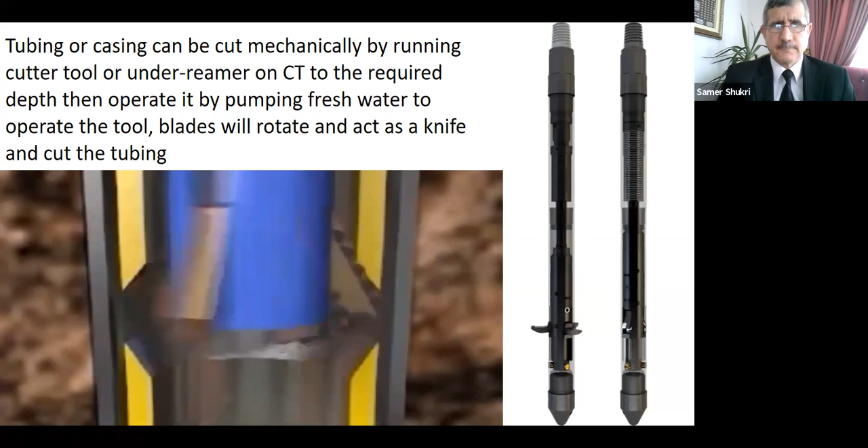Tubing is cut now, using the knives. Pull out of hole. When the tubing is cut, the anchor will release by simply pulling out of hole. Interesting.

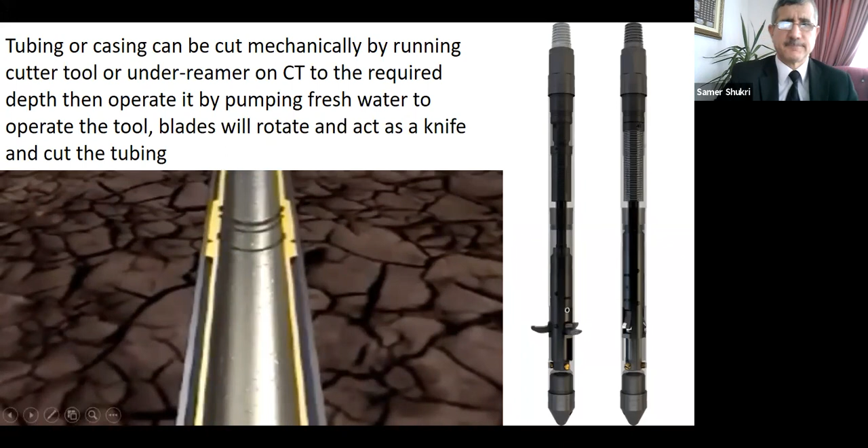Here is the last case, and we will finish our introductory session. While running coil tubing, pumping at 1.5 barrels per minute, the coil tubing got a rupture. What will happen? This one is similar to this one, you see.

In this case, we have to secure the well, close the BOP, slip and pipe rams. After that, we can cut a piece of this and make a double end connector. This is a double end connector, you see it. One piece stays with the coil tubing in the well, and the other piece will be with the coil tubing on the reel.

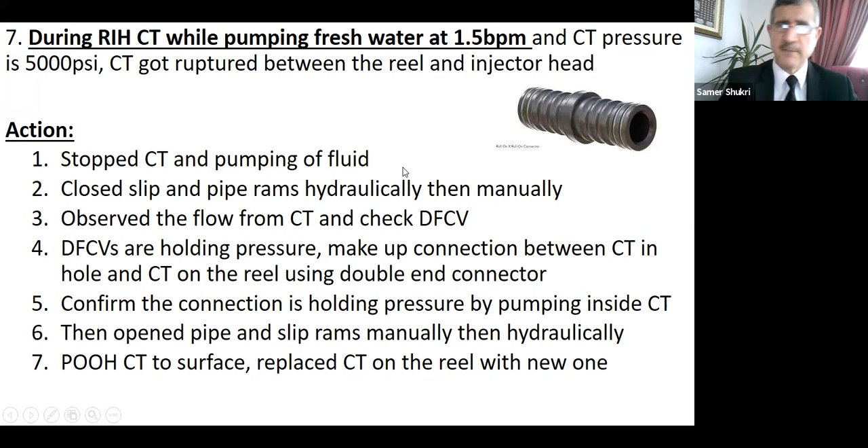After that, we ensure we do a pressure test and increase the pressure to ensure it is holding. After that, we can open the BOP and start pulling out of hole, secure the well, and get all the coil tubing onto the reel. Then the reel will be thrown away and we run another one.

But you see how dangerous this is. Nobody should be working in this area because it is very dangerous. Imagine if there is acid inside the coil tubing and it falls on anyone, it will kill him. So our work is not easy, it is not 100% safe. We have to take care and make sure we are following procedures, following the principles that protect ourselves, the environment, equipment, and the company's reputation, because everything makes you responsible, as an operator or a supervisor.

So with this, we finish our introductory session. The course will start on the 10th of next month.